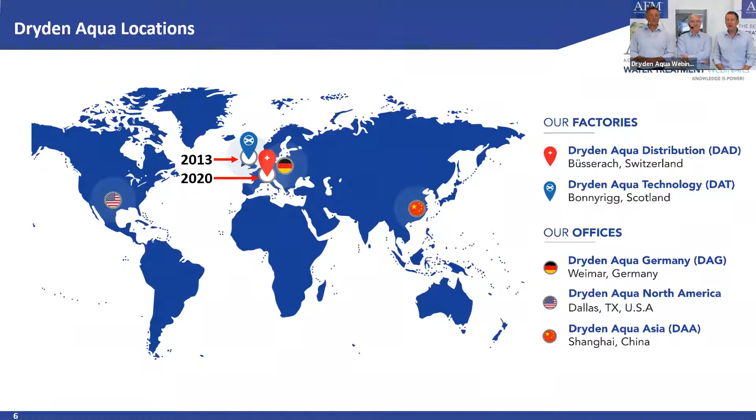We also have an office in Germany, logistics space, mostly responsible for Eastern Europe and Russian markets. We have a sales office in the US, also with a logistics space with 5 warehouses in the US. And we have an office in Shanghai in China for the Chinese market, with one warehouse.

Let's show you 2 minutes of one of our production facilities, and this is the newest that we have, the most sophisticated, that's Switzerland. 2 minutes, we will be back.

So, biology of sand filters. Biology, that's one of your favorite topics, huh? Yeah, and I'm an economist by education, so I learned all this from Dr. Howard Dryden. Now let's talk quickly about bacteria.

In all water we have bacteria. We have heterotroph and autotroph bacteria. Heterotroph bacteria feed from organics and produce inorganics. Autotrophs are just the opposite. Heterotroph bacteria, if you have nice conditions, enough food, warm temperature like 30 degrees, can double every 30 minutes. So this really goes exponential. Autotrophs are doubling at a much lower rate, every 10 to 12 days.

Let's start with the heterotroph bacteria. Main species is Pseudomonas, you can call them the pioneer. They're in the water and they want to survive. So maybe there are oxidants like chlorine in the water. So what they do, they immediately look for a surface in contact with the water, attach to this surface, and encase themselves in a mucus. Mucus? Mucus, yeah, extracellular polymeric substances, EPS. That's what most water treatment people understand about the cover, the slime.

In pools, we just call it a biofilm. These bacteria attach to the surface, covered with this slime, this mucus. This is what we call a biofilm. And then they grow, they double, and this biofilm becomes thicker and thicker, more and more stable, and more acidic. This biofilm is quite resistant against chlorination because chlorine cannot penetrate it, it has to oxidize from outside to inside, and by this you lose concentration. So even with high chlorination, you will not remove 100% of the biofilm. You'll have 1, 2, 3 survivors, and these are the very strong bugs, survival of the fittest, who are very good at developing that biofilm again to protect themselves.

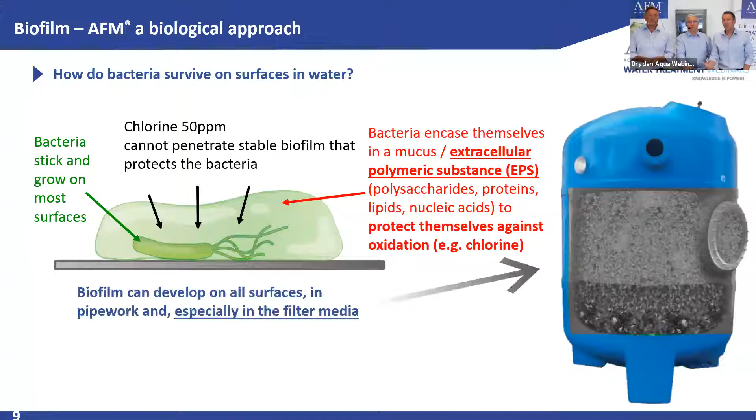So like Dominic said, bacteria will attach on surfaces that are in contact with water. What's important to understand is that sand is, one, a natural breeding ground for bacteria, and two, by far the largest surface in contact with water, because 1 cubic meter of sand has approximately a surface of 3,000 square meters. So very easily, sand can be 90 to 95% of the total surface in contact with water.

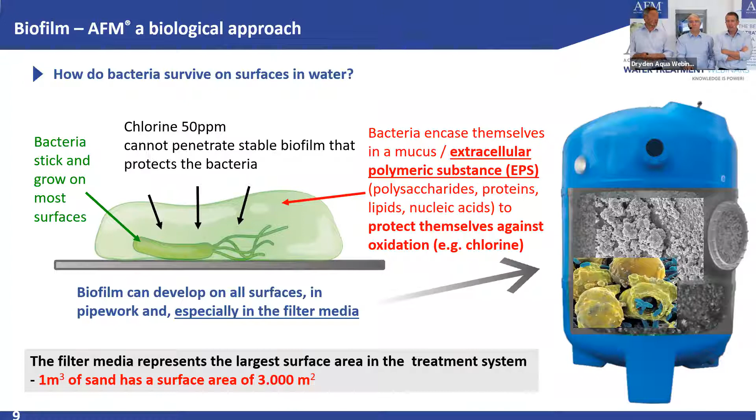Absolutely true. We know sand is a good mechanical filter, but it will also start to become a biofilter. In aquaculture, we use fluidized sand beds as biofilters to grow bacteria, and some sand filters too. I remember especially IDE in Israel, they use sand filters as a combination of biofilter as well as mechanical filter. Exactly, but it's a compromise solution. As you all know, compromise solutions are not the best. It's better to make first this, and then this.

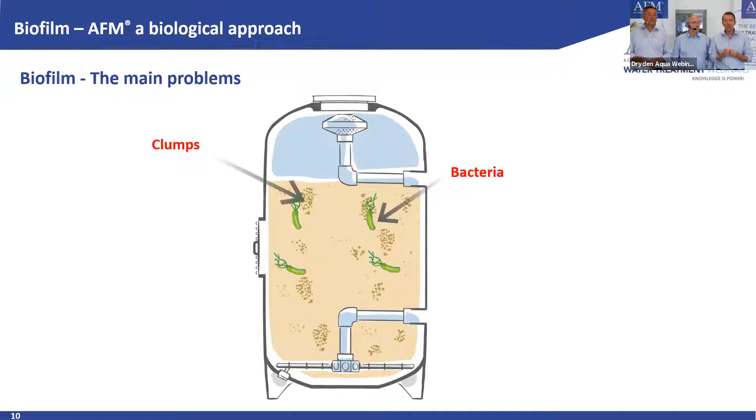Okay, problems? So what is the problem with biofilm? What happens in the sand filter is over time that the biofilm leads to coagulation of the sand grains. So they will start to stick together and they form lumps, they form clumps in the filter bed.

And ultimately this will lead to channeling of the filter bed. Now, based on the application, this can start sooner or later. We see this usually starting after about 3 to 6 months when this can happen. Can be 12 months, depending also very much on the temperature, on the load, on the backwash velocity that you can achieve.

But if you have channeling, then you don't have any more reliable filtration. Then you have highways which are going through your filter bed. So you bypass the media. You don't have any more filtration.

And very often you see that this biofilm, these colonies are discharging into the water. It's when your water becomes really cloudy and where it will end up on your membranes. That was last session that we discussed. Or you have pathogens like crypto, where you don't have any more 1 micron filtration, where you have 20 micron filtration. We'll see that later on.

And this is not good. This is, and you see this especially when turbidity increases. You have much more suspended solids and biomass, which is discharged into filtered water. Your filtration is not any longer reliable. So you start seeing these spikes in turbidity, if you look at the filtration profile over time.

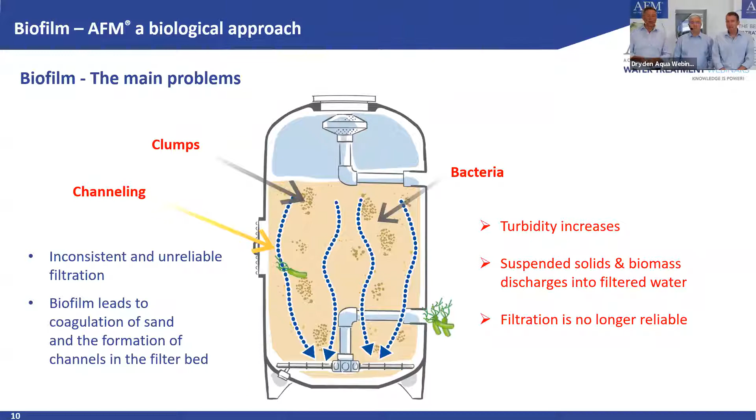Now, what's important here is that initially with fresh sand, you will have a good, reliable filtration, but this problem starts after some time, when the autotroph bacteria are moving in, because they're producing organics, which is the food source for the heterotroph. So this is when it becomes a lot more dynamic.

Let's go to the next one. Now, of course, you can try to solve that problem with hyperchlorination, shock chlorination, etc. And it helps always a little bit. But the best is you avoid it. And you do this with a bioresistant filter media. And the very best that I know is AFM.

So why and how is the surface of AFM self-sterilizing? What happens is a catalytic reaction on the surface of the grain. This is when dissolved oxygen in the water reacts with metal oxides that are part of the AFM grain, that are on the surface of the grain, that will react, and they will form free radicals.

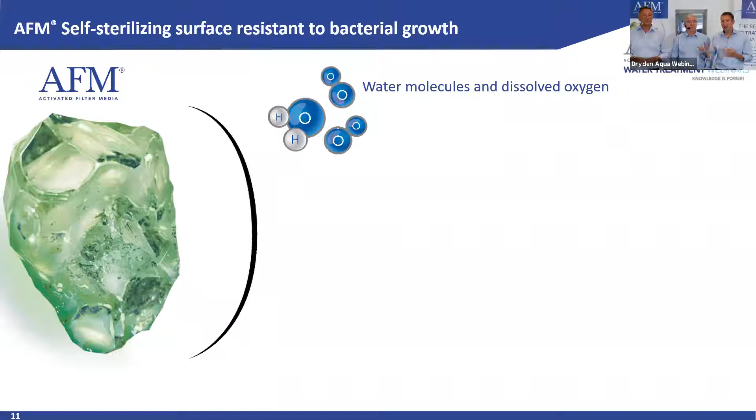You can click a couple of times to see the animation. Water, and you have the oxygen here, two ppm dissolved oxygen minimum, and then you form these free radicals. Yes, and these free radicals have a very high oxidation potential, higher than chlorine, for example.

They only live fractions of seconds, but this is enough to oxidize bacteria that are trying to attach on the surface. So these guys want to move here on the grain size, but that doesn't work. You're gone, you're oxidized.

So in order to have a self-sterilizing surface, you need two things. You need a glass type, which is the green and the brown glass, which contains chromium oxide and iron oxide, which is necessary for this catalytic reaction. You also need an increased surface, and this is what we do with our activation process, because this is a surface reaction. The more surface you have available, the more of these free radicals you will produce.

Yeah, and they only stay on the surface area. They don't discharge to them. Exactly. Yeah, they're very, very short-lived. It's a small amount, but it's enough to protect them.

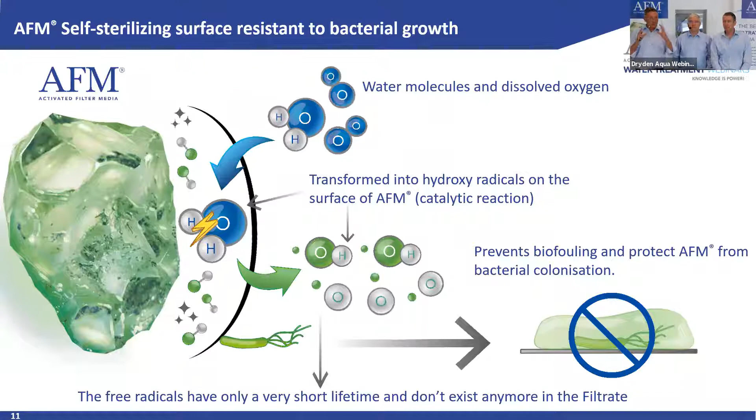But here you see also the DNA of Dryden Aqua, and especially of Dr. Howard Dryden, as a biologist, let the problem not come. With sand, you let it come, and then you try to solve it with a lot of oxidants, etc. Howard, as a biologist, he goes the way, let's not get to the problem. Let's prevent it.

Okay, let's come to AFM. For 20 years, we had AFM, and it was AFM. Now we have two types of AFM, AFM standard, and since 2 years, we have on the market AFM NG, which stands for the next generation. Both of these AFM are bioresistant. Both of them have a huge increased surface, but there are some differences.

Yes, there is a key difference between them. AFM standard has a negative surface charge, which is very important. This allows it to remove cationic charged particles, especially heavy metals. That's really the benefit of using AFM standard: adsorption of heavy metals. That's the key property of our negatively charged AFM standard.

So mainly iron, manganese, and arsenic can be removed quite efficiently. That's a problem in many groundwaters. Arsenic is a big issue in Bangladesh.

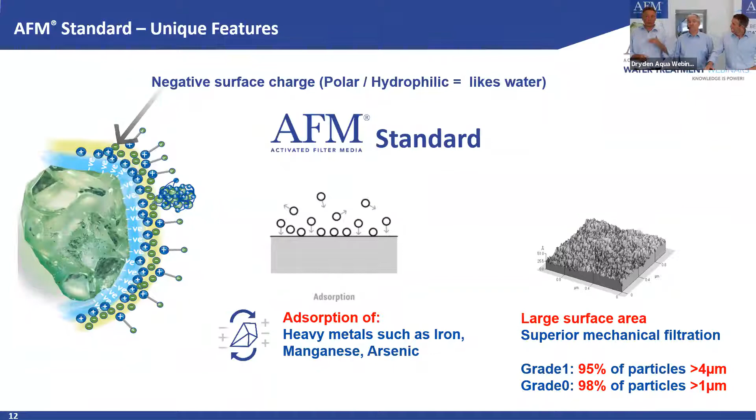There's also some arsenic in Greece, and I think also Italy and Spain. Iron you find everywhere in groundwater - iron and manganese are a big problem anywhere. Arsenic is spread around the world. And of course, as mentioned before, there's a large surface area, making it a really good filter media - it filters down to 4 microns. That's really great.

So what's the difference compared to NG? Why did Howard develop the NG? First of all, what's the difference to the standard product?

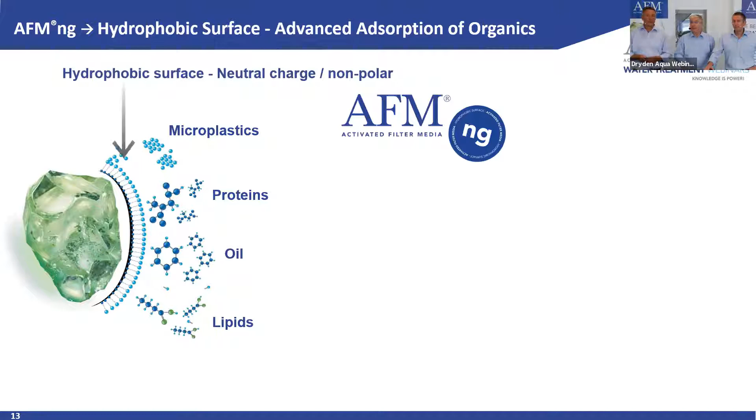AFM NG, the next generation, has a hydrophobic surface area. What does that mean? A hydrophobic surface means it can remove organic particles like microplastics, proteins, oil, and lipids. So the main reason for its development was to remove microplastics.

That was his mission. You know, microplastic is hydrophobic - it doesn't love water. This is why he developed the AFM-NG, because with a hydrophobic filter media, you can easily remove hydrophobic particles. And when we tested it, it really works fantastic - much, much better than AFM standard.

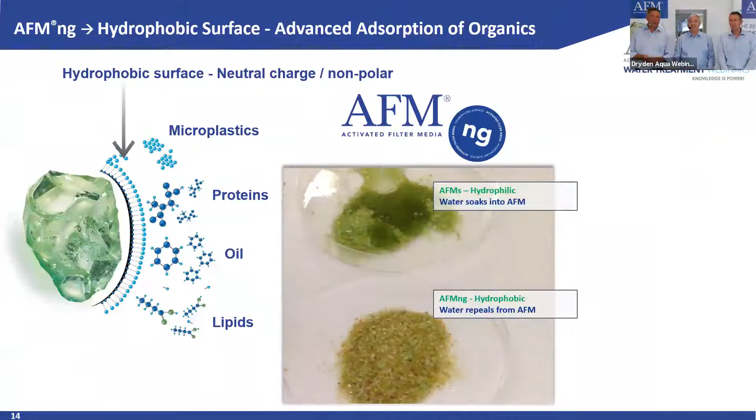When we tested it in our very fancy test lab, we also found it works very well with proteins, oils, and lipids. But to keep it simple, we can show you in a picture here. Up top you see AFM standard, which is hydrophilic - it loves water. Below we see AFM NG, the hydrophobic one - it repels water, it doesn't like water.

By the way, it's also easy for us to show the activation process, because some people said, well, I don't believe in it, it's just marketing. Our activation process has 3 steps: 2 chemical steps and 1 thermal step.

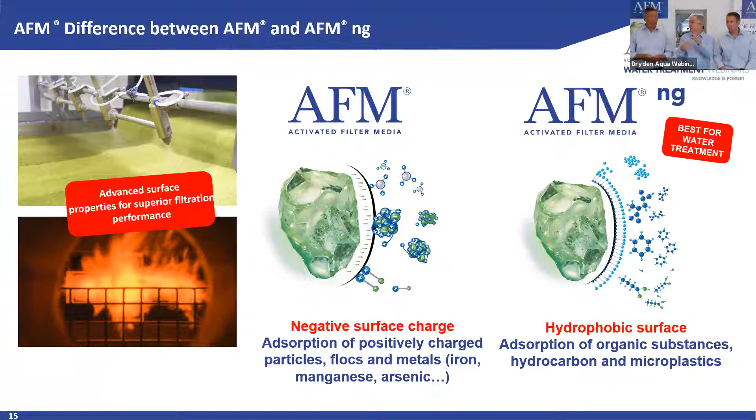Actually, you can combine these two if you want to - you can make a 50-50 mix and get both benefits.

Exactly. Okay, so we were talking about performance and how well it works. Now you can believe us, or you can believe some independently verified tests, which we did with a French institute. What's the name of that institute? IFTS - it stands for Institut de Filtration et Technique Séparative. Très bien, merci beaucoup, Dominique. Bien sûr, very good.

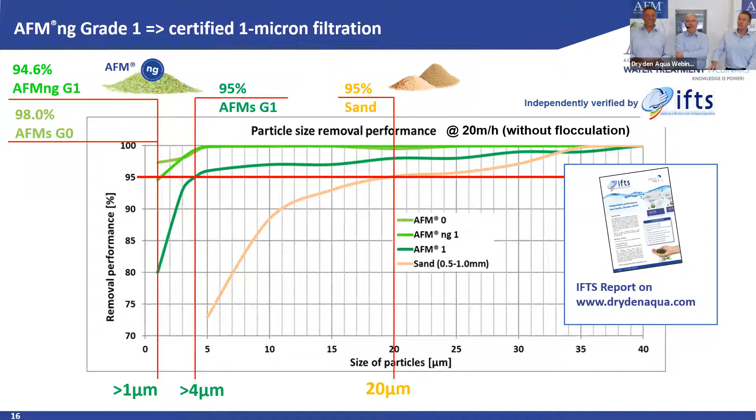Each of these tests cost more than 5,000 euros. So we have our data for sand and for AFM at different filtration velocities that you also find in our IFU, our handling manual for AFM. And it was 1 meter of filter bed.

One word on backwash, this is very important. Filtration is a 2-step process: you filter and then you clean. And it's really important that you clean it properly. To clean it properly, you need a bed expansion of minimum 15%, ideally 25% or higher, to bring the particles to the top of the filter bed. And to fluidize this filter bed, whether it's sand or AFM, you need a certain velocity. This will depend on the water temperature - the warmer the temperature, the more velocity you need. It also depends on the grain size and the shape.

Now let's assume sand and glass, in our case AFM, have exactly the same size and the same shape. Because sand is 20% heavier than glass, you need 20% more backwash velocity in order to expand the bed.

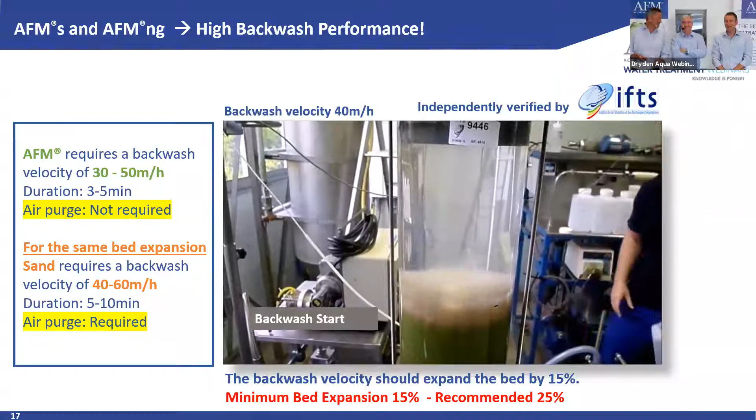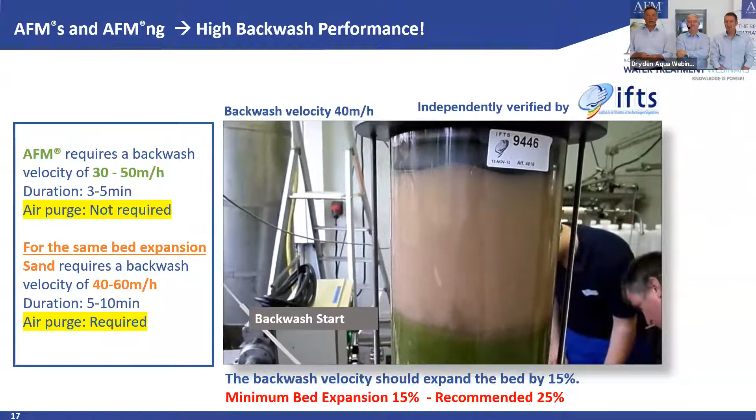And here you see this bed expansion that we have. Slightly, it's starting to expand. You see how you have the expansion, how the solids are brought to the top. It's impressive to see how these particles are removed. And this is how it should be in your filter. And therefore you need reasonable hardware - I always call the filter the hardware and the filter media the software.

You also need, especially if you have heavy particles such as heavy metal that we see later on, a certain velocity to have enough shear forces, drag forces, to bring them not just to the top of the filter bed, but to wash them out.

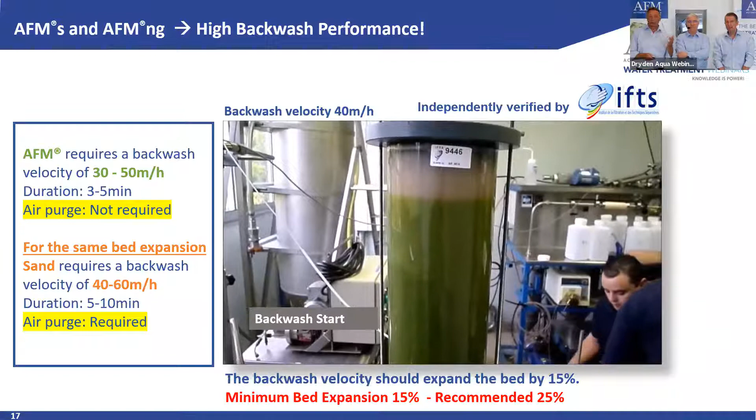Sand usually needs 40 to 60 meters per hour backwash velocity if you have 0.4 to 0.8 millimeter grain. If you have 0.7 to 1.2, AFM, depending on grade 1, grade 2, between 30 to 50. But we really need this bed expansion.

So we like the high speed backwash. Short and fast. Short and fast is better than long and slow when it comes to backwash.

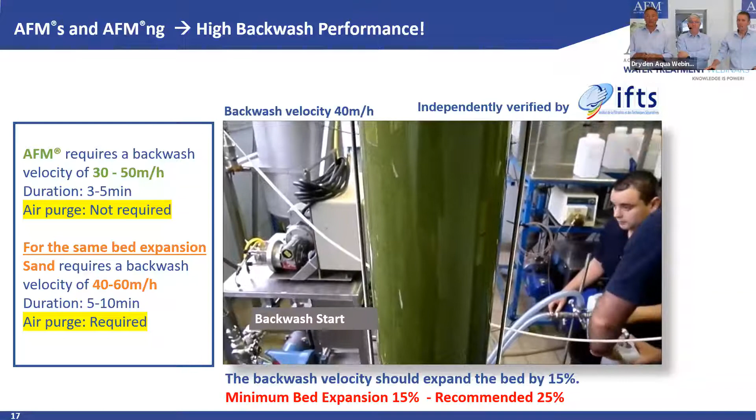I had a lot of discussions with aquatecs where they said, I have an existing installation, I can only backwash at 10 meters per hour, I filter at 5. We do not touch these projects, we say no, we can't do it. It will work perfectly for 4 weeks, but then performance goes down.

It's really important. A filter is like a bin. You have to empty this bin from time to time.

So our backwash velocities, we have in the pool sessions, we explained this in detail, how you do this and in what time. We did this in the first session, some more explanation, but also the pool academy is really a good learning experience. But let's stay on water treatment, so you can review this.

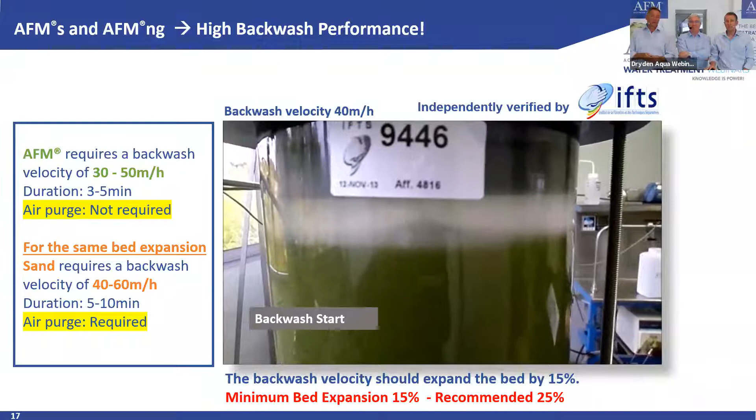A last point, which is really important: in sand, especially if you have bigger filters, you need air purge. You really need this. Why do you need this? Because you want to rip off the biofilm from the sand grains, and air purge is doing this, only maybe 95%, but it's doing this job.

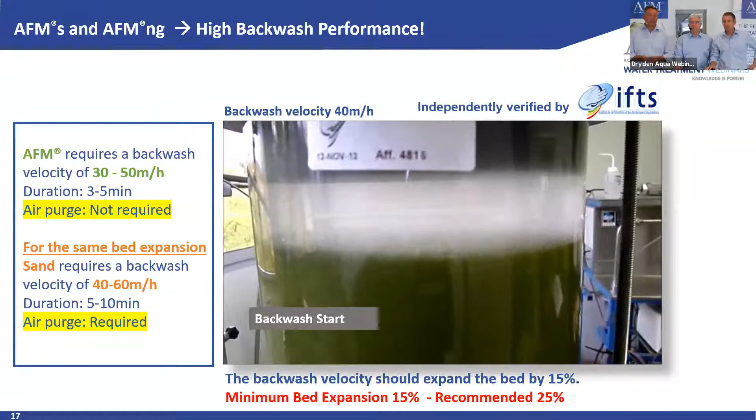We don't have this biofilm, this is why we don't need air purge. So you can save the blower on the capex, you can save this operation cost, energy, we don't need that. You can do this not with the NG, but with the standard, but we don't need it, and that can be quite a significant saving. It is a significant saving, exactly.

So here, this is how it looks after 3.5 minutes. So this is more or less what you need, the backwash curve.

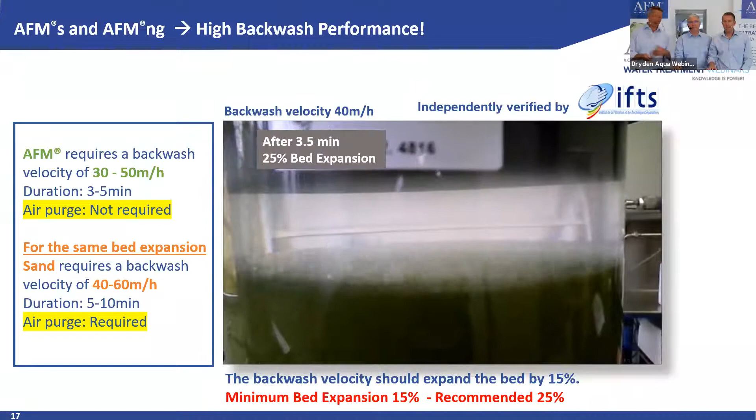We also have in our IFU handling manual, we just take a couple of slides out here to show you grade 1 bed expansion, grade 2 bed expansion. They have quite different expansion depending on the velocity you run through the filter.

That's why it's important. We always want to have a minimum of 15 to 20% bed expansion. So that's why it's really important that you take care about your bed expansion using our filter media, so that we can achieve a good backwash velocity.

First for expansion, secondly also to remove all the particles. So you find this in our IFU, in our manual.

Please come to us, maybe not for the projects with 200 kilos, but everything above 20 tons, we're happy to consult you, especially in the first 2-3 projects. If you have done 2 projects, you know it by heart. But yeah, however, we are here, especially Jochen.

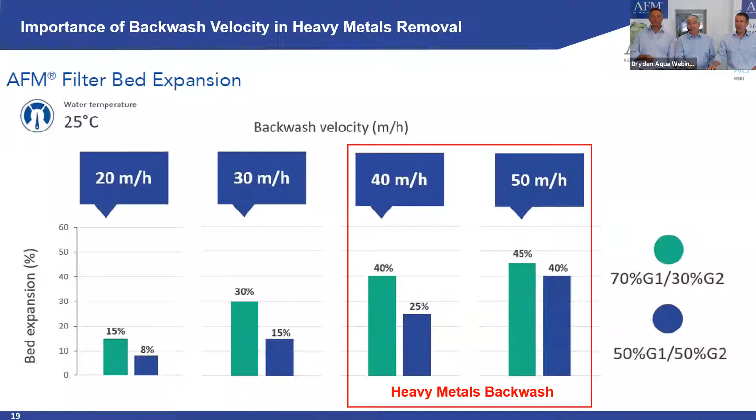For heavy metal removal, we need a higher backwash velocity to really remove these heavy particles, because they go against natural gravity. You need a good drag force, and that's only achieved with high speed backwash.

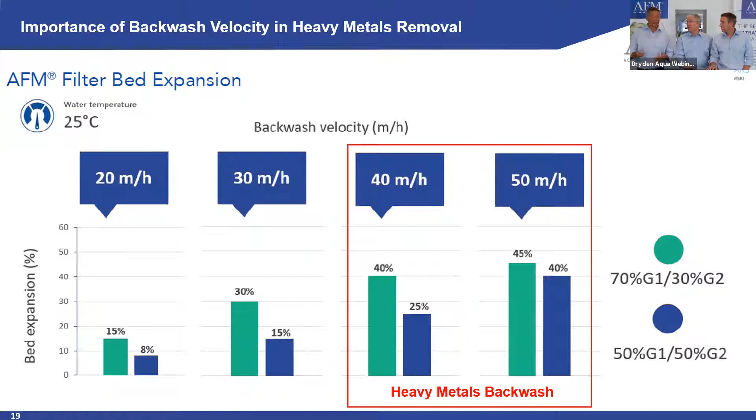If we have this 40-50, we would go here for a 50-50. Otherwise we get too high of bed expansion, especially if the water is a little colder, and we would lose media. Exactly, losing a little bit of media is okay. The fines you have, this 5 to 10%, this is okay. This is like with whiskey, we call it the angel's share. But then it should stop.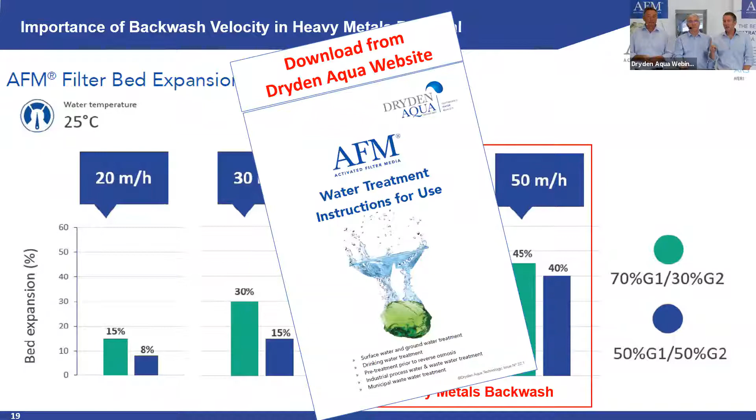So this is the most important document, the IFU, instructions for use. Go to our website, click on downloads, and you can get the most up-to-date version. We have an imperial version and a metric version.

Okay, this was the theory before, and now we come to the practice. Yeah, half an hour.

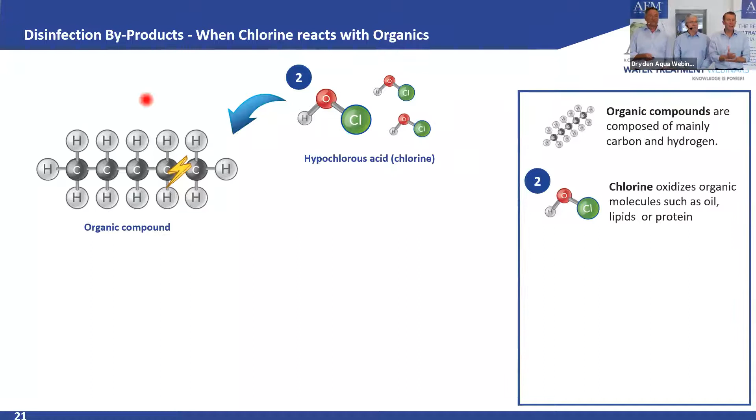Let's quickly talk about chloroform and THMs in general. How are THMs being formed? This happens mostly in chlorinated systems where large chain organic molecules are chopped down by chlorine, by hypochlorous acid. Chlorine continues to chop them down into the smallest organic molecule there is, which is methane - 1 carbon, 4 hydrogen.

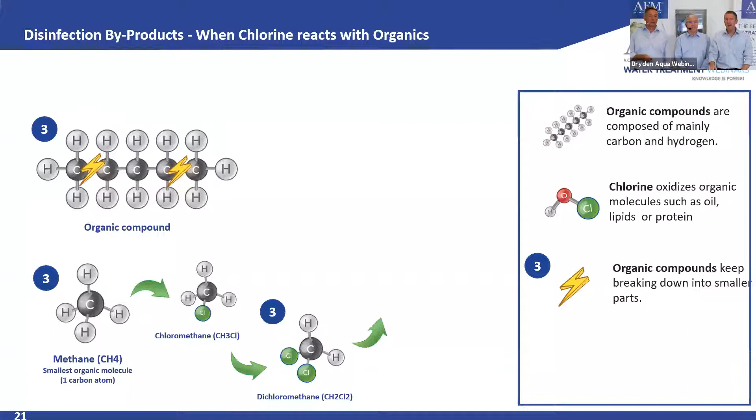Also, UV can cause a breakdown of organics. Then chlorine continues to react - this is what's called a substitution reaction, where some of the hydrogens are replaced with chlorine. This continues until we have chloroform, or trichloromethane: three chlorine atoms, 1 hydrogen, and 1 carbon.

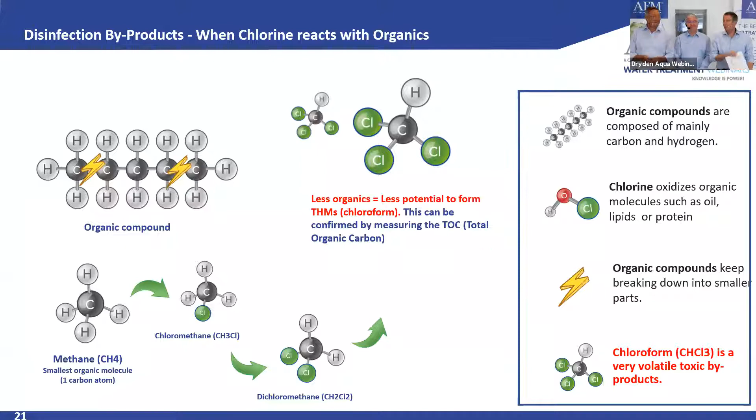But the key thing is, to form chloroform you need two things: chlorine and organics. So if you remove 50% of organics by better filtration, you have 50% less THMs. Exactly, so you use AFM - this is exactly what we are doing. We also have a solution to deal with THMs to some degree, but prevention is the key.

One word on the health issues of THMs and chloroform. It's very volatile - as you can see, Henry's constant is 185 bars, very volatile. The gas comes out; if you breathe it in, it goes into your lungs, through your lungs into your bloodstream. It attacks your nervous system. It's carcinogenic, and it was the first anesthetic. The more you breathe in, you're not getting smarter by doing this. It's a little bit like alcohol, I guess - well, we have more experience with alcohol than with THMs. Honestly, I do not know how big a problem it is to drink water with chloroform.

I don't know how big of a deal it is, but I know that when we joined Dryden Aqua in 2012, Dryden Aqua had a nice order of 3,000 air diffusers to strip off chloroform in all their reservoirs, and it worked absolutely perfectly. Okay, let's move to pathogens in water systems.

I'll start with Pseudomonas - I already explained these bacteria. These are the pioneers, the guys who build up the biofilm, and then a full species of other bacteria and microorganisms move in. If they are alone, planktonic, you kill them very easily - with 0.13 chlorine, you kill them very easily. But the moment they are protected with the mucus, with the EPS...

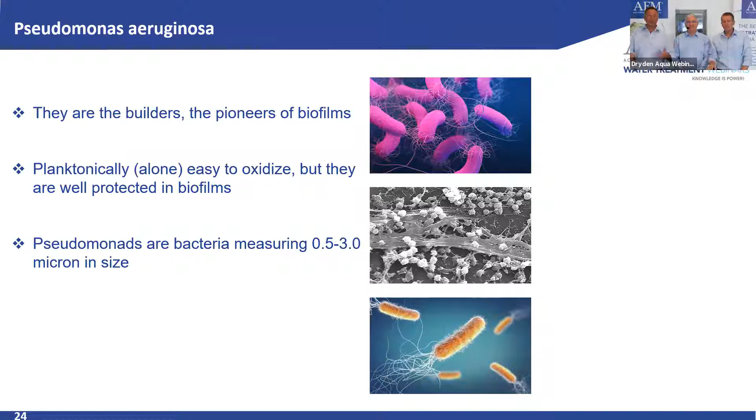EPS - that's actually what you see in the middle of the picture here, showing the EPS. Then they become very resistant. They are quite small, not easy to filter, so with AFM we are not really filtering them - we avoid that they can grow. This is the key one: self-sterilizing surface, no biofilm, that means no Pseudomonas.

Okay, so the next pathogen that is commonly found in surface water is Cryptosporidium.

Milwaukee, 1993. This is responsible for diarrhea, vomiting, and so on. It's of fecal origin.

The bad news about crypto is it's highly resistant to chlorine. It can survive at 5 ppm chlorine for 5,000 hours. That's long. It basically can't be killed with normal chlorine dosing.

The good news, however, is it's relatively big in size, 3 to 6 microns. And you remember AFM-NG with its 1 micron filtration makes AFM very good at removing 99% plus of Cryptosporidium simply through filtration, in one pass.

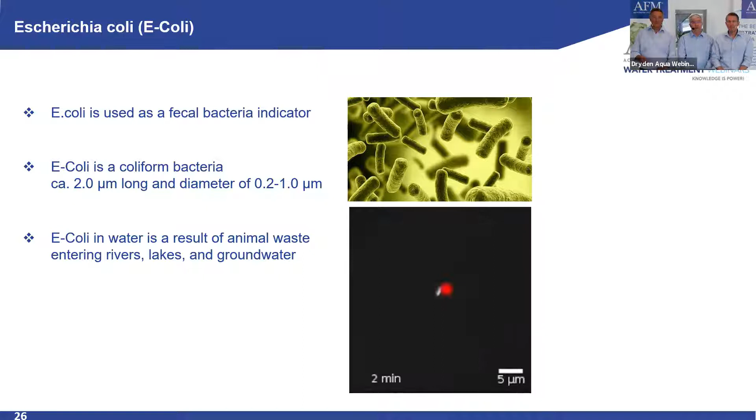You can see here in this little animation, it grows quite quickly. In a couple of minutes it becomes quite big, 5 micron, but usually it's small, between 0.2 and 1 micron, 2 micron long. And of course, like with many other species, it comes in through animal waste, entering rivers, lakes, and groundwater.

As we mentioned before, if you have no growth, mainly from Pseudomonas bacterial layers, you also avoid the attachment of E. coli, and that also reduces your potential growth or release of higher concentrations of E. coli. Absolutely. And maybe one word back to this - even if you say, well, I have a sand filtration, I do coagulation, flocculation, I filter down to 1 micron...

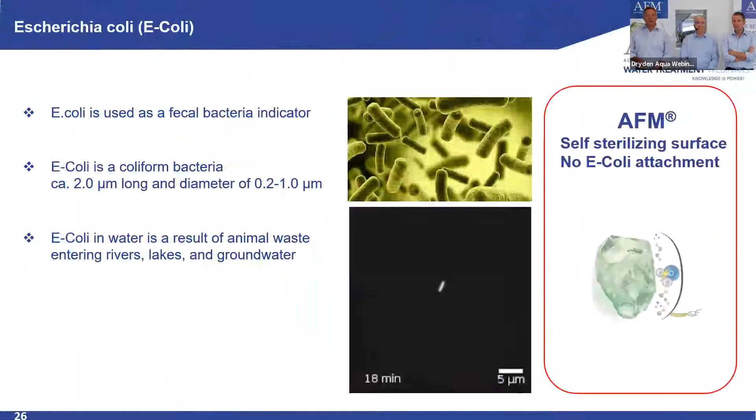Yes, all perfect until your filter is channeled. Remember the highway - then you can flocculate, coagulate as much as you want, they go through. Okay, last but not least, Legionellas.

There are about 70 different species of Legionella. Most of them are completely harmless, not a problem. Some of them can be dangerous, especially Legionella pneumophila. Not if you drink it - you can drink thousands, millions of it.

It's not a problem, but if you inhale them, then you can get Pontiac fever or Legionnaire's disease. And if your immune system is not the strongest, there's a good chance you will not survive it. They grow usually in water temperature between 25 to 45 degrees. It's really a problem in cooling towers.

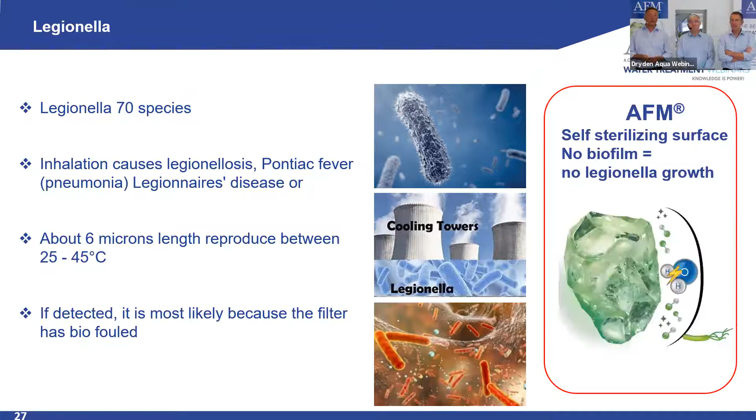In pools we have some problems with it, in spas, but here it's really a problem with cooling towers. And we can avoid it with our self-sterilizing surface. Philip, do you lead us through this, how that works? And obviously, like you said, Legionella is always an indication of biofilm.

This is what we experience in these cooling towers. You can have Legionella just in tap water also, or in biofilm, but they really grow, they double in biofilm. So what Dominic mentioned, the Pseudomonas, they are the pioneers - they are responsible for the formation of biofilm.

Next, amoebas are moving in. Amoebas look for the protection of biofilm. These are relatively big animals - these are pathogens that move in.

And then what happens is the Legionella actually like to be absorbed, taken in by amoeba because it protects them. And the amoeba cannot digest them. So Legionella will grow and multiply within these amoebas until they burst - they explode, and then a lot of millions or thousands of Legionella are released at one point.

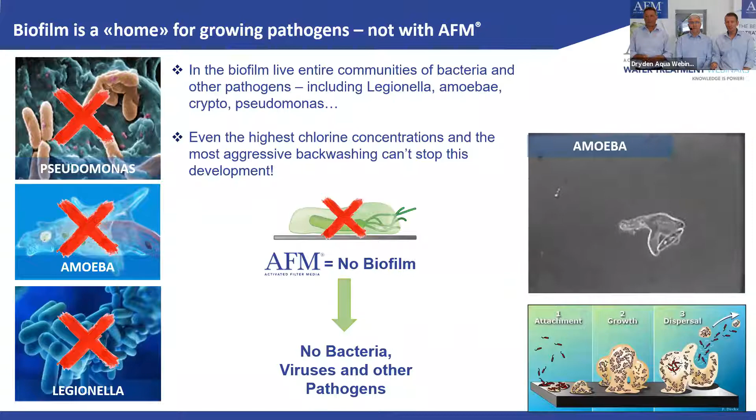But that means, as a consequence, if you have AFM, you don't have Pseudomonas, you don't have amoebas - amoebas only can live in biofilm. So if you don't have a biofilm, amoebas cannot live. No biofilm, no Pseudomonas, no amoebas. No amoebas means no, or significantly less, Legionella and many other microorganisms. The key is no biofilm, and that's why bioresistant filter media is important.

Okay, surface water - AFM and surface water treatment. Let's take a look at some installations, some case studies. So here's a picture, this is from our friends from India, Nikunj.

This is an RGF installation in India that was done years ago, together with Howard also. Howard was on site. So Nikunj, we would love to get an update on this with some more results. We haven't seen anything in a couple of years. I heard from Howard it's working very fantastic, and as Nikunj is placing always new orders, I guess it is, but we are missing data.

And that goes to all of you. You ask us, do you have data? Do you have case studies? Do you have reference points? Yes, we have, if you give them to us, right?

But surface water, very often gravity filter in India as well as in Switzerland. Newest project from you, Jochen. Quite recent, only 3 weeks ago we started this plant in operation. It's in Zurich. Actually, to be honest, 3 days ago we just started with this, but 3 weeks ago we filled this in here. I'm quite proud of that. Very nice installations, like in India, but now also in Switzerland.

As you can see here on the right picture, it's near Zurich. We have here the big lake, and the water is taken out of this lake. Of course, the lake is already quite clean, so you almost can drink it from the lake, but of course that's not drinking water. Not in Switzerland. In other countries, you may even drink it directly.

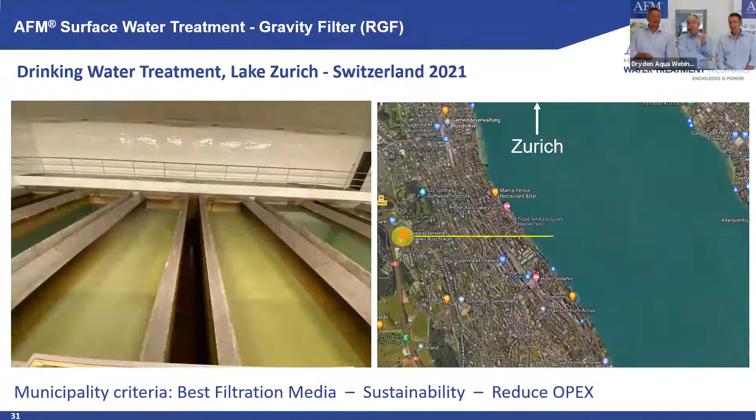So what is the process? The process here is we take the lake water, it's treated by just directly with filtration. They add some coagulant to it before, so they have a regular coagulant dosing, and they want to overcome that problem of coagulant dosing, meaning they want to reduce the cost, reduce chemical use, so they were looking for the best filter media. The best filter media they found with AFM. They replaced all these media, sand, anthracite today, and they run today at 6 meters per hour, like before, and 25 meters backwash velocity. So really, that's perfect.

In our case, we really achieve a good performance, I expect. Yeah, this water still goes through ozonization and I think even carbon filter afterwards, so after filtration. These guys used to replace the sand every 5 years, and we do not have yet the regulation or the approval or the certification for the SVGW for Switzerland for drinking water. You have to do an individual one in each country. It's a long process, also not a cheap process. But this operator, he said, I want to have the best, I believe, in AFM.

And he has watched our video that you have seen in the beginning and said, this is fantastic what you're doing. This is really sustainable, and this is why I want it. So sorry, we cannot share already the results with you. We will have the first results maybe in 2-3 weeks, and then, of course, we have to let it run for 1 year, really to show the difference.

But what is your estimation? Let's see their estimation. First of all, why they want the best filter media, because they want to reduce the coagulant or stop coagulant dosing. They, of course, expect to improve even the water quality, which I'm sure we are doing. And of course, we have no air backwash, as we mentioned before, we stopped the air backwash here. So they are not using any more air backwash. That's an energy saving and operating and maintenance savings cost for them in the future.

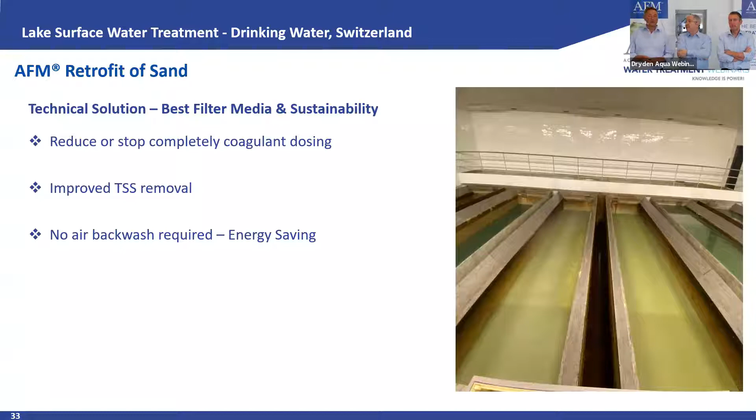We also cut down his backwash times quite dramatically, right? We cut it down from around 20-25 minutes total backwash, including air scouring and so on, to around 10 minutes at the moment. We're still optimizing, but it will be around 5 to 10 minutes backwash every couple of days, once a week around. What do we achieve here? What do we expect? It's not tested exactly yet, it's not taken, but we are confident with this.

So green is the hope? Yes, it's not only hope, it's a belief. Yes, absolutely, it's a belief. Yes.

So turbidity is already very low in the feed water, as I mentioned before. It's 0.5. With sand, we reached about 0.2 today, but we'll definitely get below 0.1. I'm sure it will be beyond detection level, which I think is 0.05. Typically they write less than 0.1, which is below detection level.

So for cell count, they do a regular count of 1.6 million. With sand you maybe cut it to half, but because of no biofouling and much better filtration properties, we'll be below 500,000 - actually I think much more below, but that's conservative. Then there's other mesophilic bacteria typically measured too - there will be some remaining in the sand, but we'll definitely have much less with AFM.

Color - that's maybe not so important here, not really related to the removal, but it's also something we may achieve some removal of with organics.

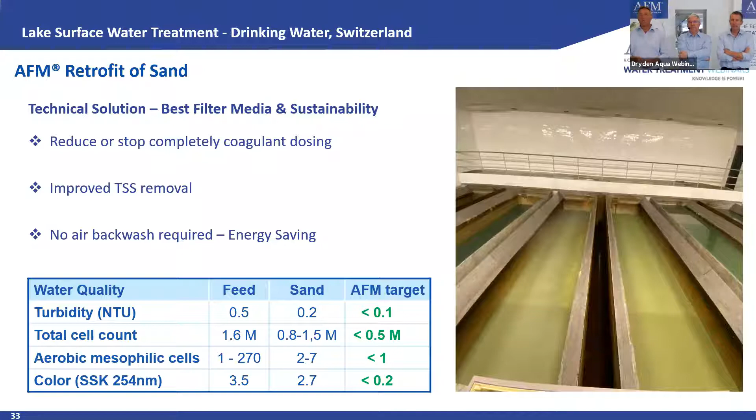I love this project because it's the first one in Switzerland and we are Swiss. And what I really like, this guy said, I don't care, I don't care about the regulations, I just do it. And of course the health authority will now oversee, check, and control this on a much more regular basis. And it will be perfect.

Good, you'll also enjoy in the coming weeks helping us here in production. Yeah, that's another hands-on learning experience. This is what Philip and I will do tomorrow - instead of going to the fitness, which costs a lot of money, we help here in the production, and this is good.

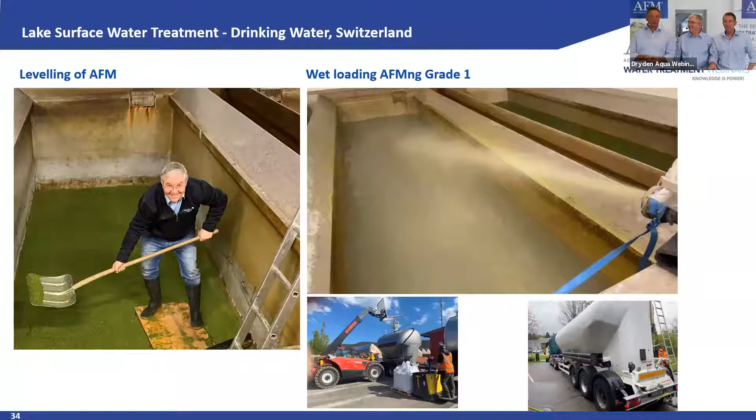Maybe one thing to add, because you mentioned the certification in Switzerland - every country is different. Very important to know is that AFM comes with NSF 61 certification for drinking water, and it comes with DWI. So in many countries you can go ahead with AFM and be fully covered from a certification perspective - but not yet in Switzerland, not yet in France, not yet in Germany. Usually in the European Union you have to go into each and every country and do this exercise - it's kind of a new bureaucracy.

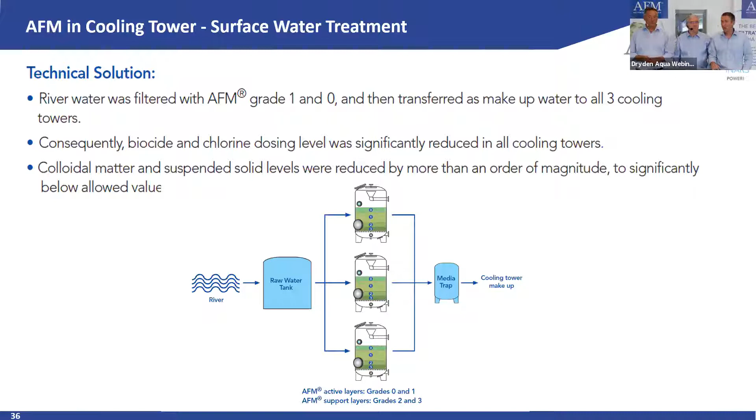Here's another great example, a case study from our friends at Hoimyang in Korea. This project in Hoimyang, South Korea was done 9 years ago, for river water makeup water filtration for cooling towers. They had very typical problems: high TSS coming in, and high demand for chemicals, biocides, and so on. So our partners developed this - a fairly simple, straightforward process, taking in the river water and going straight into the AFM filters for makeup water production. They were using grade 1 and grade 0 for this project.

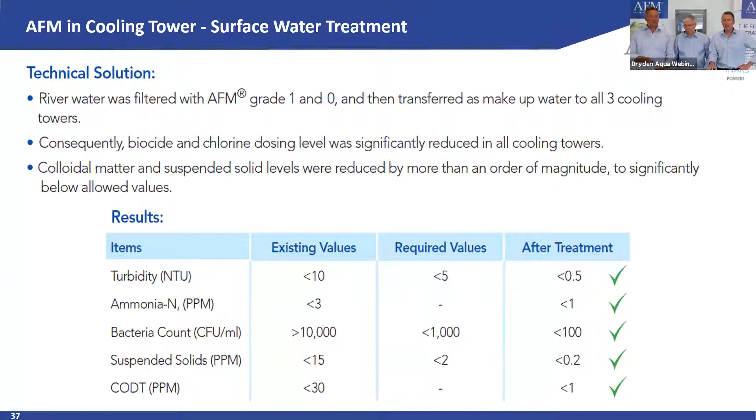As a result, they were able to bring down turbidity by a factor of 20, from 10 to 0.5, which is good. They eliminated biofouling in the filter, so the bacteria count was dramatically reduced - down by a factor of 100. Suspended solids too. So excellent results - this has been going on now for 9 years, still generating great results.

Okay, let's come to a very important subject: iron, manganese, and arsenic removal. As long as these metals are in solution, you cannot filter them. I know when you joined us a year ago, you knew only one way to bring them out of solution.

Of course, usually oxidation chemicals are used. Chlorine dioxide and potassium permanganate are used to oxidize heavy metals in water before they are filtered out. You convert ferrous to ferric, from Fe2 to Fe3, which means going from dissolved to undissolved, so that's how you remove it from the water. After doing this, you can get AFM to remove it to nearly any concentration below 0.1 milligrams per liter, which is great.

There's a second method, and this is aeration. Again, this helps avoid chemicals. If you aerate the water for 30 minutes or longer using the perfect air diffuser, you achieve the same effect. We've been manufacturing air diffusers at Dryden Aqua for 30 years. This is one example, the 1.3 meter diffuser, available in 10 different lengths. The longest is 3 meters, which is by far the one we sell the most, good for 10 cubic meters of water per hour.

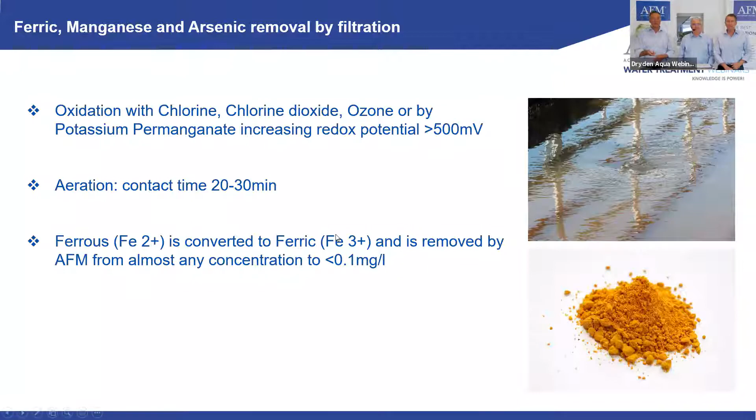Manganese and arsenic are a lot more difficult. Here you have two options. Option one: if your iron content is 5 times higher than your manganese or arsenic, with that high redox potential and 5 times more ferric, you will also oxidize the manganese from Mn2 to Mn4, and arsenic from As3 to As5. Both become solid particles - arsenic to arsenate, and manganese to manganese oxide. I'm not a chemist, but I'm learning here.

This is good, live learning as you go. So this is what we call co-precipitation - through the iron, you co-precipitate the manganese and the arsenic.

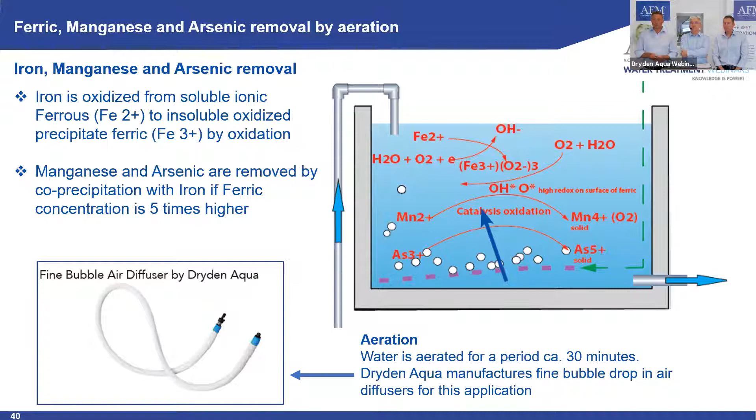Okay, of course, yes, you can also do it that way. You have other benefits with aeration as well. What are the other benefits?

First of all, aerating the water strips out volatile products - methane, hydrogen sulfide, actually very often the case in different locations worldwide, and chloroform as well, these VOCs. At the same time, it stabilizes the alkalinity and the pH, which gives you much more stable water quality. That's very important because it really gives much better filtration too.

Filtration is improved, water is stabilized, and you increase the oxygen level, which we like for our AFM for the self-sterilizing properties to be even more efficient. Because that could be a problem - if you take groundwater that's quite low, where you have zero oxygen, and bring it up, the AFM may not be bioresistant anymore. You need 2 ppm of dissolved oxygen in the water to create the self-sterilizing surface.

So we love aeration, absolutely. It's also really important - you drop the zeta potential, and that's another benefit, you also increase the coagulation reaction and the coagulation and flocculation properties in the water. And all in a natural way.

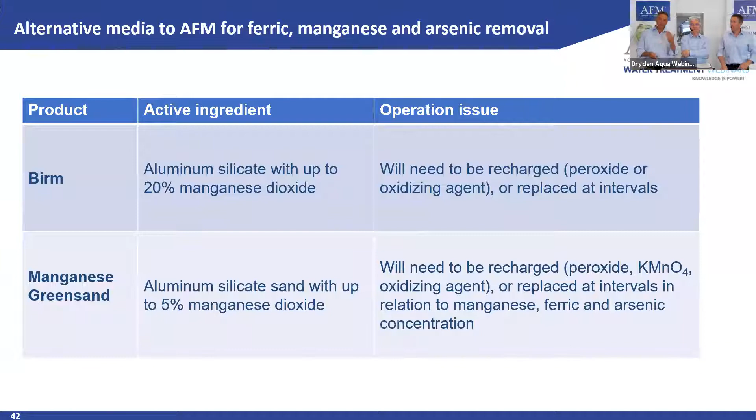Exactly. Summary - AFM compared to sand. Again, suspended solid removal is just a galaxy better when we compare AFM to sand. Bacteria removal - sand is bioactive, so it's not applicable, while AFM is bioresistant, so we have much better performance there again. And then iron and manganese removal, we just discussed this - sand has basically no impact on iron and manganese removal, very little.

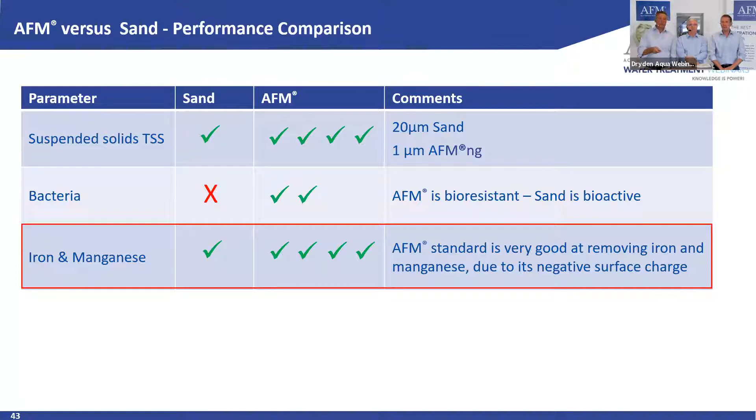There is an impact, but that's why it only has 1 check mark. I don't know how you call it - check mark. Okay, check mark, yes. Compared to... exactly, we have to speed up a little bit.

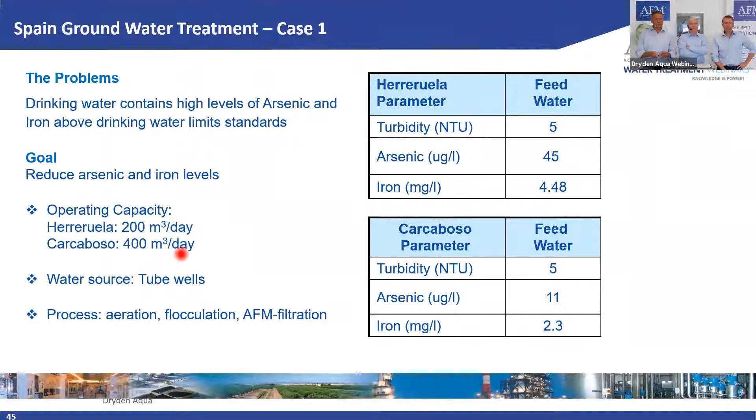Groundwater, maybe 2 other case studies. This one is from Spain, quite old by the way, it's also roughly 8 years old. 200 cubic meters a day, and here the other village, 400 cubic meters a day. Yeah, here you see the filters that they used.

There are a few things that you could improve in the process. They also did aeration and a little bit of oxidation because they didn't use our aeration - higher amount of iron, yeah, it was a high amount of iron. They used some oxidation because their aeration system was quite poor, to be honest. But you see here turbidity factor of 10, not as good as we've seen before. Arsenic factor of 4 below the WHO level, and iron from 5 down to - you said always below 0.1, here we are at 0.14.

That was wrong, but I think we can accept it, we can live with this. And the same goes here with the other village, and we also have these approvals. One which is a lot more impressive is the one that we showed in the first one - this is Square Pharmaceutical Company.

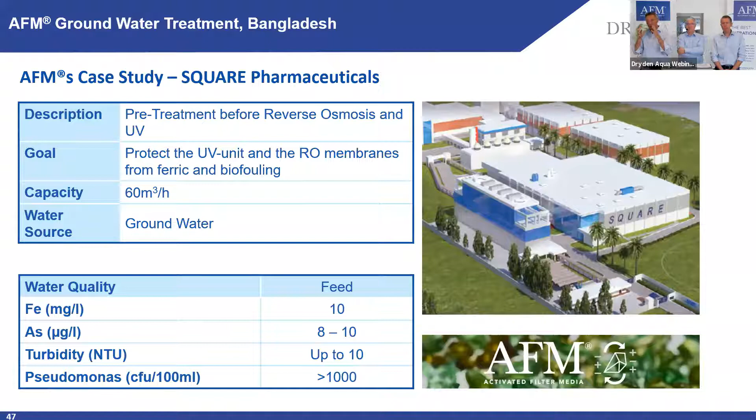Groundwater pre-treated before RO. They had huge problems with iron, huge problems with turbidity, and huge problems with Pseudomonas. They had sand filter, followed by carbon filter, activated carbon filter, followed by cartridge filter.

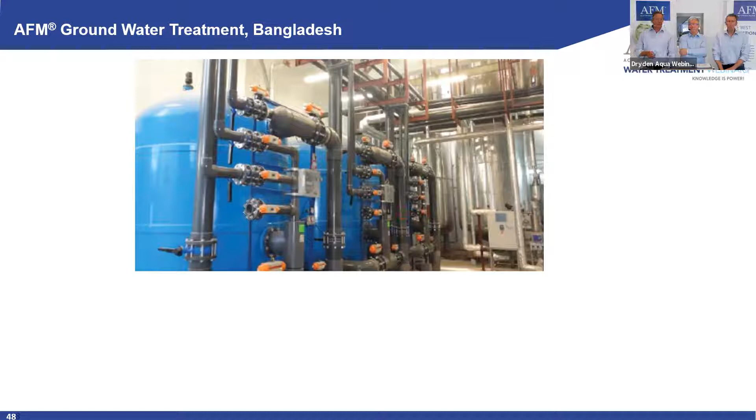Our partners from BioVista in Bangladesh, hi guys, you're great. They made a very nice installation here with Colplus filters. Project installation was done by a colleague in Italy. They did a fantastic engineering job. It's 2 hours of aeration, filtration velocity only 5 meters per hour. You can't do it better. Look at the results they achieved: from 10 to 0.03.

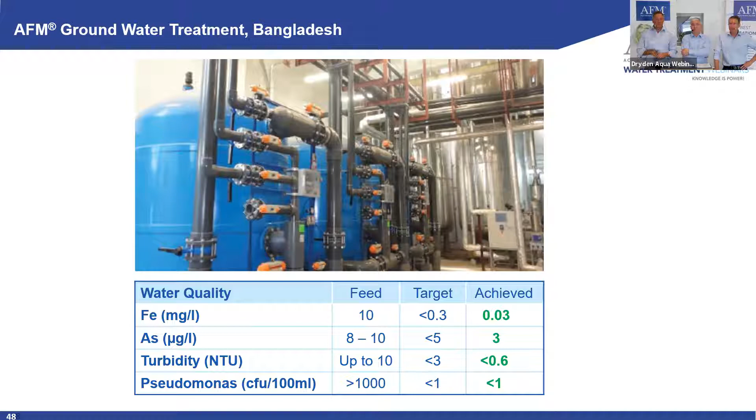You can go that low, but if you do such a good job as our friends in Bangladesh did, you also see turbidity and Pseudomonas just gone. So no biogrowth, yes, none.

Again here we don't have results, we just heard from our Chinese partner that they are very happy. But we are happy to be a supplier in the brewery industry because, I'll share a secret with you, we quite love beer.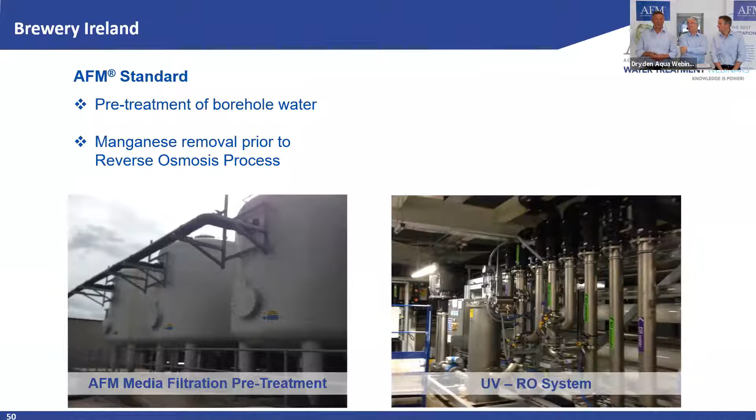So they oxidize the manganese with chlorine dioxide, and after the filter they remove it with UV before going into the RO system. Again, we don't have any numbers, but I heard from Howard that the payback of this project is not years, it's months. And I like this beer.

In Ethiopia, this was delivered in October. They promised to install it in February and send us the results. I think they installed it in March, so we're still pending the information. But Mr. Müller, if you're on the call, here we are, waiting on you, or at least on your results.

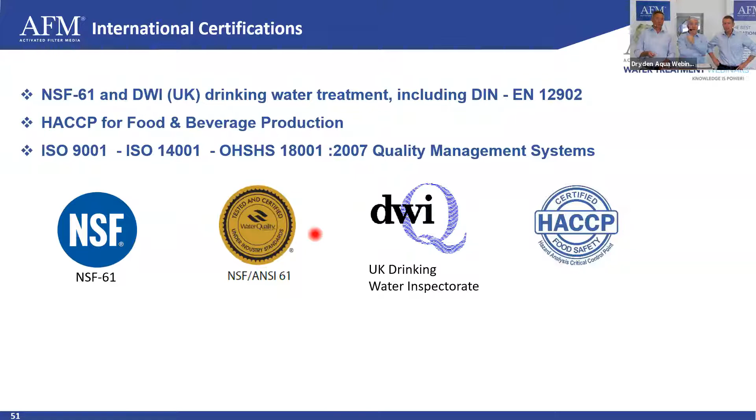To operate all of these applications in drinking water and in the food and beverage industry, we have the so-called HACCP food safety certification. Our production is producing according to HACCP. And as you mentioned, Philip, we also have NSF-61 drinking water, and the UK drinking water approval. So we have everything we need for the other ones we are working on.

So what are we talking about next time? Same time, same place in a week. Wastewater treatment, yes, wastewater and oil removal. Biological sand filter comes first again. We talk about backwash velocity in a little more detail. Hydrocarbons and oil removal will be one of the subjects, and of course some case studies around wastewater and oil and hydrocarbons removal.